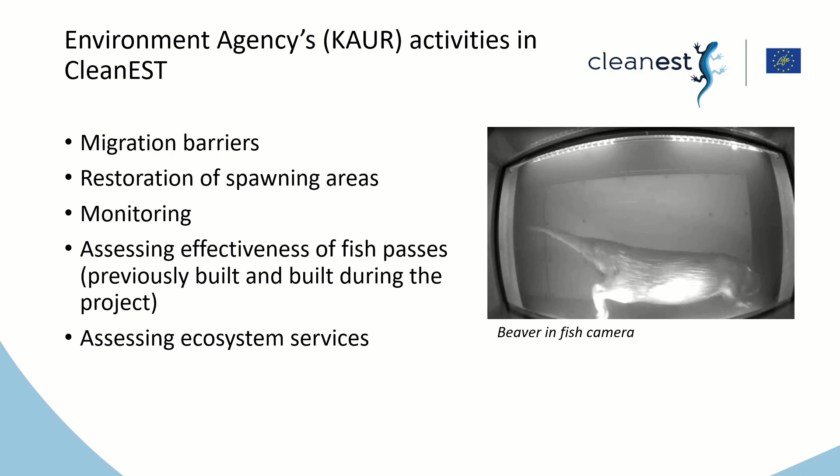Our activity C11 is addressing the migration barriers. In our project application, it is written that we have to find solutions for at least 6 migration barriers by the end of 2025. At the first stage of our project, we made an inspection of the Viru sub-basin migration barriers, and from them we selected our priority objects.

What are we dealing with? The selection was based on different factors, for example the fish population potential of the river, the technical feasibility of the projects, and the cost. The biggest object is the Püssi dam, and I will talk about it in the next slide.

For now, we have already demolished 4 dams from our priority list. The works have been done without detailed work projects, only with the technical assessment of a hydrotechnical engineer, and 3 more plus the Püssi dam are ongoing. These are the dams that we inventoried.

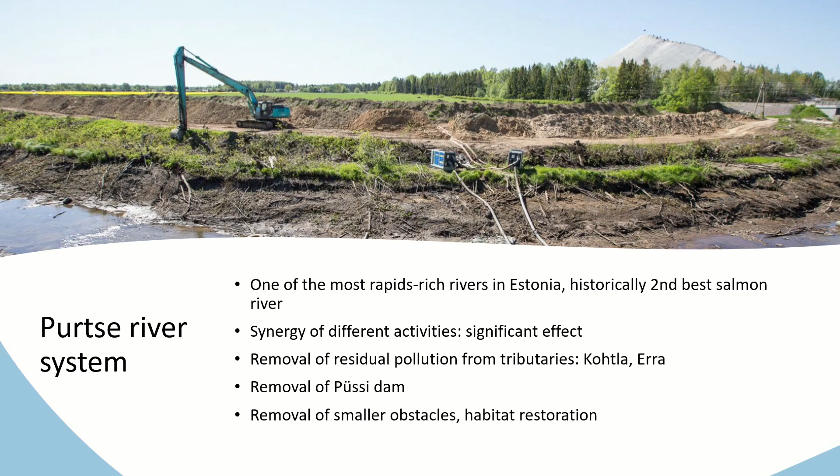Now I will focus on the Purtse river system. It is an important river in the context of our whole project. We are removing the residual pollution from there and its tributaries. The Püssi dam is also located there, and we are removing smaller obstacles, as well as restoring habitats and creating spawning areas. We are hoping that the synergy of these different activities gives a significant effect and improves the ecological condition of the river.

About the Püssi dam: it is the first obstacle from the river mouth that is completely blocking the migration of fish, so it is necessary to address it. The dam itself provides cooling water and firewater for the Repo company. At present, we have made a detailed work project, and we have also worked with the company Kobras on an environmental impact assessment of the project.

The owner is the Repo company, and actually they have been in bankruptcy for about a year now. But we are continuing with plans to demolish it and build a fish pass there, because there are possible interests for the Repo area, and possible new owners might want to use the water as well.

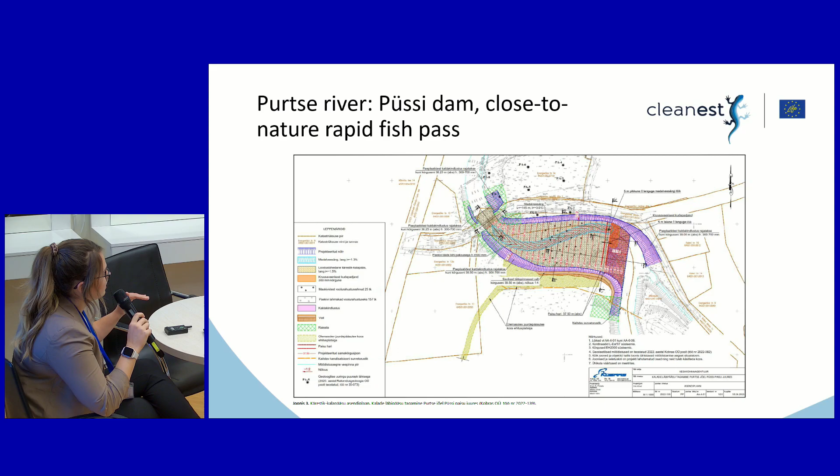So about the solution, we are building a close-to-nature rapid fish pass there. It's constructed wide enough so it maintains the water level that is there now with the dam. And we are also creating a spawning area at the upper part of the fish pass.

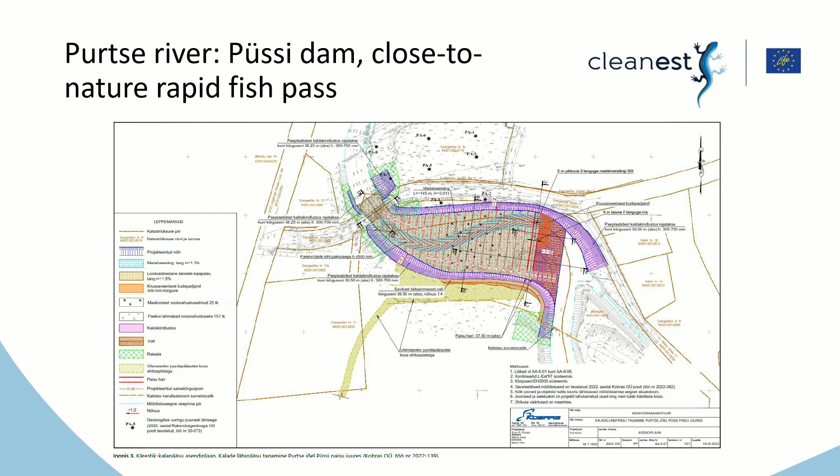Here is the location on the map. With the red is the Repo factory.

Another river we are addressing is Võsu River. This also has significant value as a spawning area for salmonids, and it's also in the list of regulation from the Minister of Environment, which protects spawning areas and water bodies of salmonids. And the dam owner operator must ensure fish passage both upstream and downstream in these rivers.

Mere and Metsa dams are the first ones from the river mouth, so their impact on the fish population is the biggest. And the dams serve no specific purpose today. The owners also have no water permit for damming.

There have been long negotiations with the dam owners. For Mere Dam, there was an issue from the Environmental Inspectorate for the owners to ensure fish passage. For both dam owners, it is important to maintain the current water level. Next to Metsa Dam, there is a motel, and they are using this little reservoir for swimming, for example.

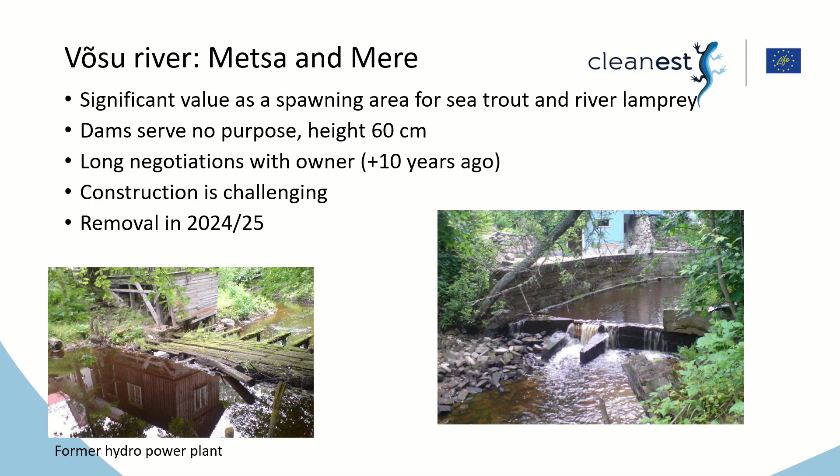So yeah, but the compromise at Metsa Dam is the owner has not given us consent to remove the object. We are making a close-to-nature rapid fish pass there, which maintains the water level.

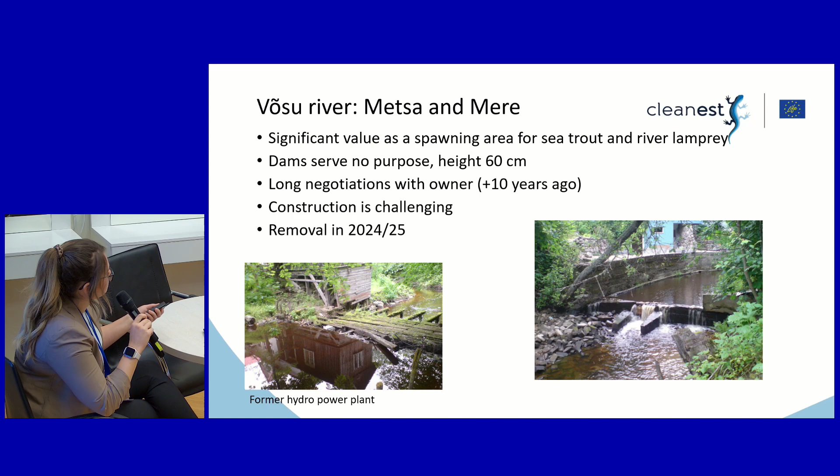One of our objects is Tamme Dam in Alajõgi River, which flows to Lake Peipus. The monitoring has shown that this barrier blocks upstream passage for fish coming from Lake Peipus.

There are also a large number of smaller dams or dam ruins located in our rivers, and we have removed some of these as well, some with the help of volunteers. I think it's also important work to deal with these.

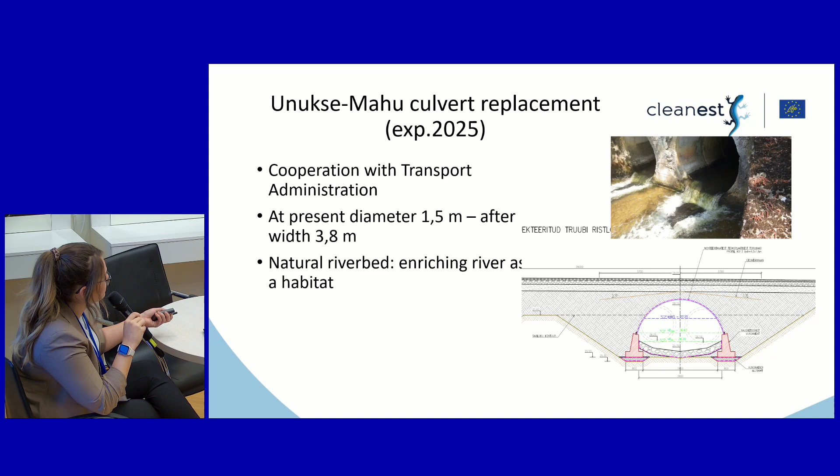One of our objects is a culvert replacement we are doing in cooperation with the Transport Administration. So thank you for listening, and I hope today's workshop will give us some solutions.

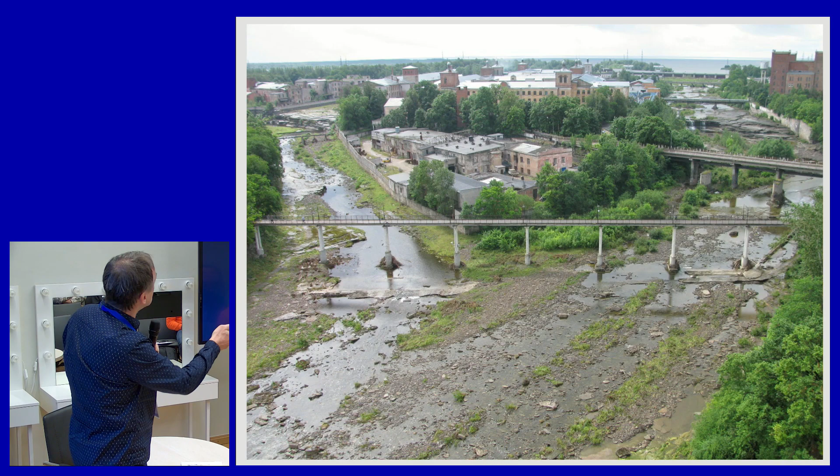In the right corner of the picture, there is a big dam, built almost 70 years ago. The whole Narva River was blocked with the dam, and a big reservoir, Narva Reservoir, was created as a result. You can see Narva town there on the map, and the big reservoir.

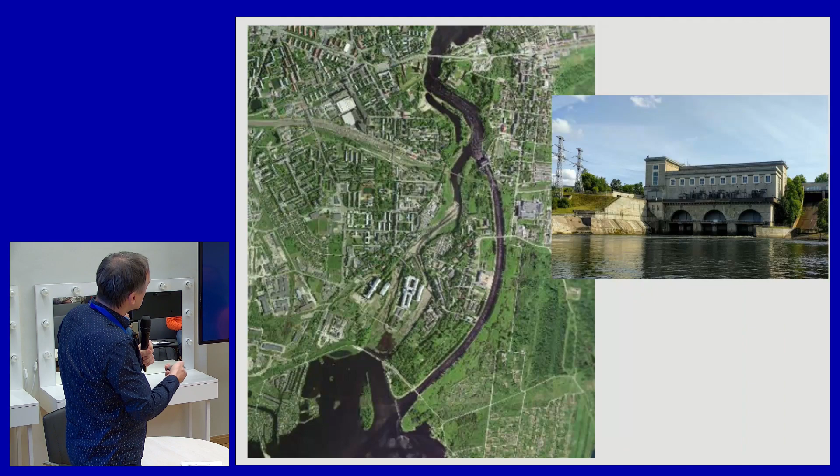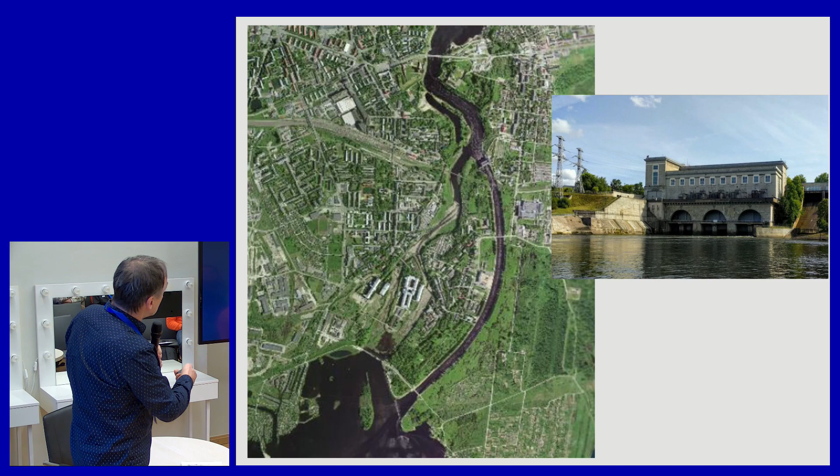What was it made for? It was made for hydro energy production. Now you can see where we are - yesterday we were sitting here. The natural riverbed is here, you can hardly see it.

Because it's dry - all the water of the river, around 400 cubic meters per second on average, is taken to the hydropower plant. You can see a picture of the hydropower plant. What's special is that as Narva River is a border river between Estonia and Russia, the hydropower plant is on the Russian side, so it belongs to Russia.

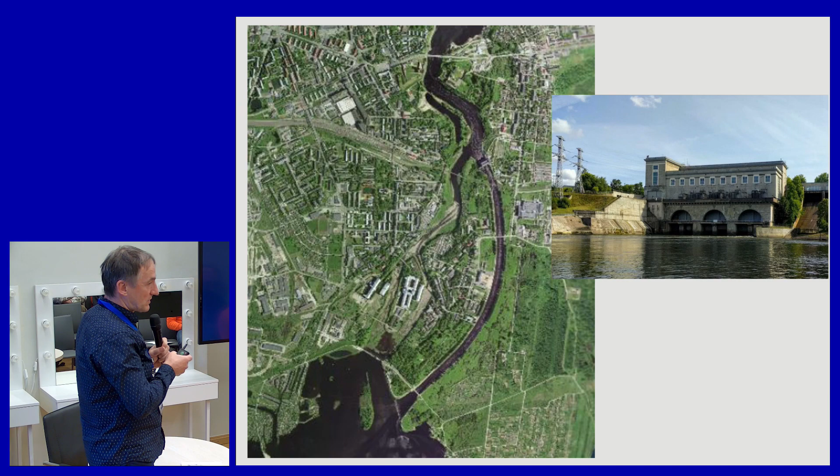It is producing money for the Russian company, and what does Estonia get? Nothing - just the dry river section. That section is not just one random part of the river, around 1 kilometer long, but it is the only section of Narva River where some fish species, salmon for instance, can spawn. So due to that dam, we lost the natural salmon population in Narva River, and a lot of other fish species suffer too.

Today we have a fairly abundant population of river lamprey still in the river. It could be much bigger, but we still have it - it's a very beautiful fish, but also a valuable one. The catches are some years 50 tons of river lamprey in Narva River. So that was, for a start, the closest dam, but the biggest dam.

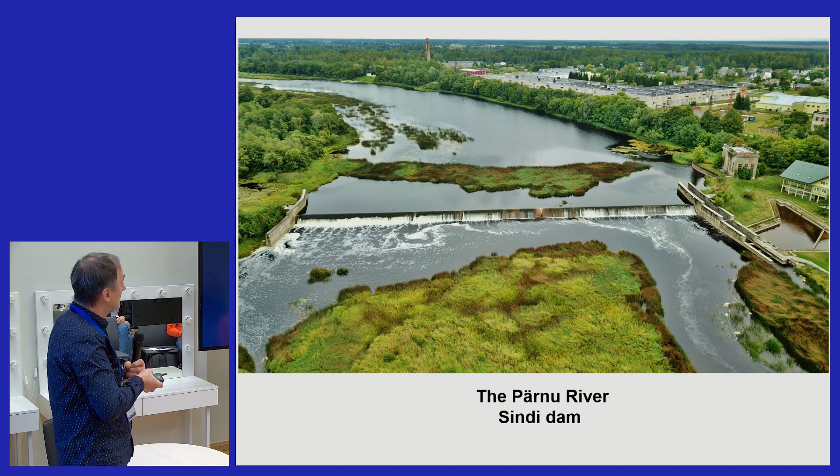When it comes to the Narva dam, we're not able to do much because it's under control of our neighbor - sometimes good, sometimes bad - which is now at war against Ukraine and killing people there. So we cannot discuss much about the Narva dam with Russia now. After they lose the war, we can come back to that issue.

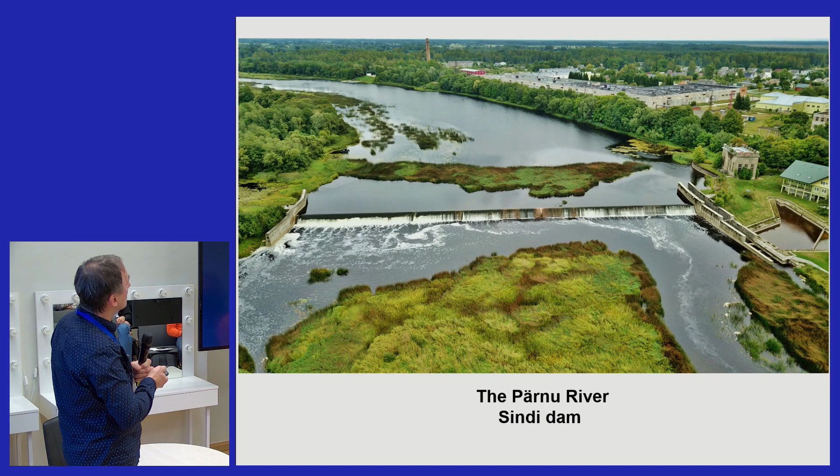That was not the only migration obstacle on Pärnu River - the Sindi Dam. There were more, but almost all of them are now opened, and the fish can go, and really are going, upstream everywhere. It's around 3,000 kilometers of running waters, smaller and bigger ones, and by now fish are already, we can say, everywhere.

But more general picture about Estonian dams after these two examples. For international audience, Estonia is quite small. I think it is 10 times less than Sweden, for instance.

And we have still quite many kilometers of running waters. It is calculated around 90,000 kilometers of running waters, and 1/3 of them are natural. Others are ditches and man-made ones.

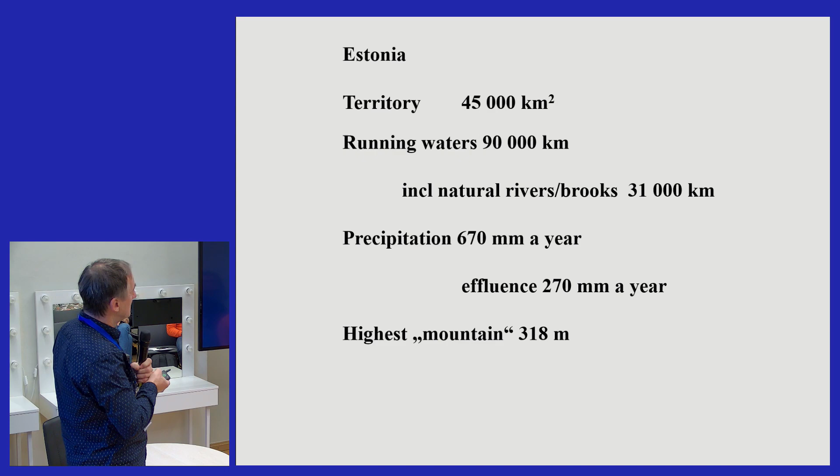One important thing to keep in mind is that we have rains, not very much, let's say medium amounts of rain every year, but the effluence, or the amount of water carried away with rivers, is around 30 centimeters. So we have some water in our rivers, but not much.

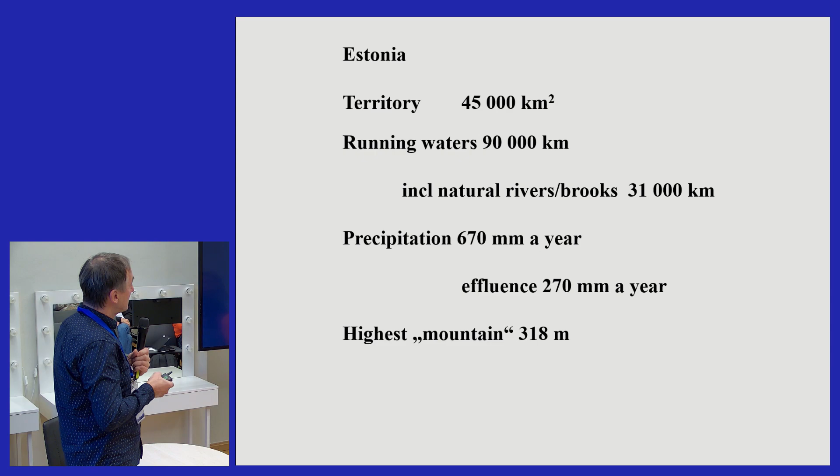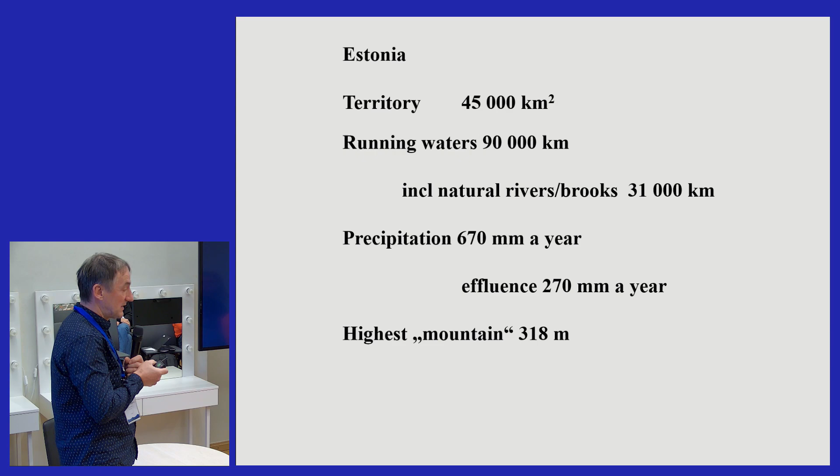And one thing more to consider is that Estonia is quite a flat country. Our highest mountain is a little more than 300 meters high. Ridiculous, some people would say.

And thinking about Estonian dams, very often when people think and talk about dams, the first idea is that dams are very important for energy programs of countries, and sometimes it is true, and sometimes it is not that direct. I'll just show you the figure I found about hydropower potential of different countries.

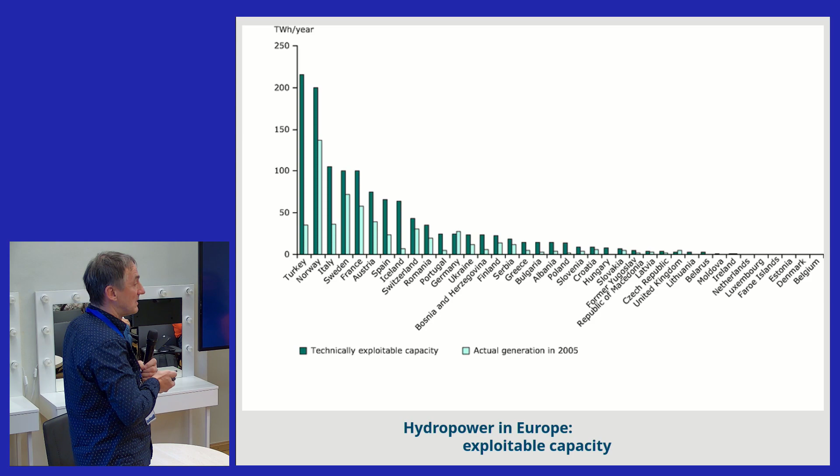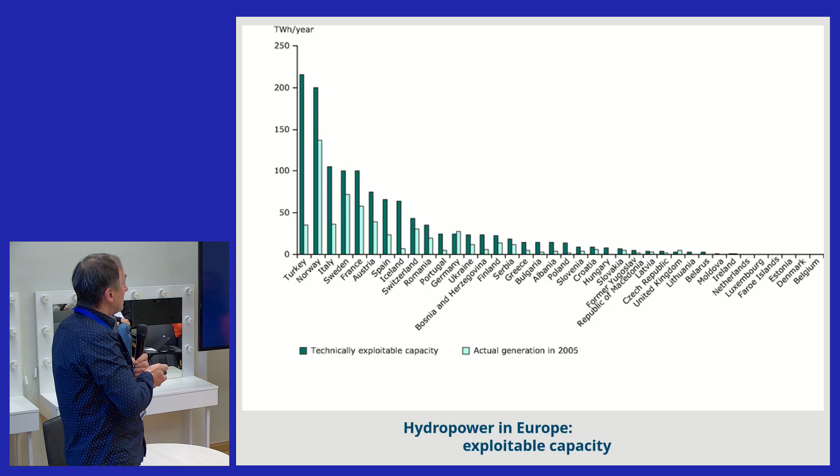When we go and talk to people from Norway, for instance, or even from Sweden, where there are mountains and big enough rains, for them in these countries hydropower really is something, and it is a key solution for energy programs.

But in Estonia, you can see in the end of that list, together with Denmark, we can exploit all our rivers and still get nearly nothing for our overall energy consumption. That is a very important thing to keep in mind: when we are talking about dams, it is not any solution for our energy programs, for our energy security. It is a little thing.

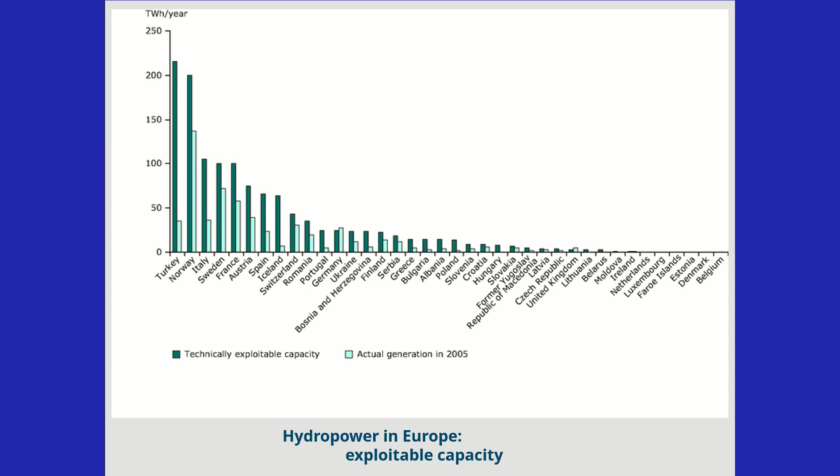In Estonia we had some inventory of dams, and the result was that nobody probably checked every single dam, but we can say that we have had in Estonia around 1,300 man-made dams. Plus, and it is important, we have a lot of beaver dams, but man-made dams and beaver dams are totally different things and different stories.

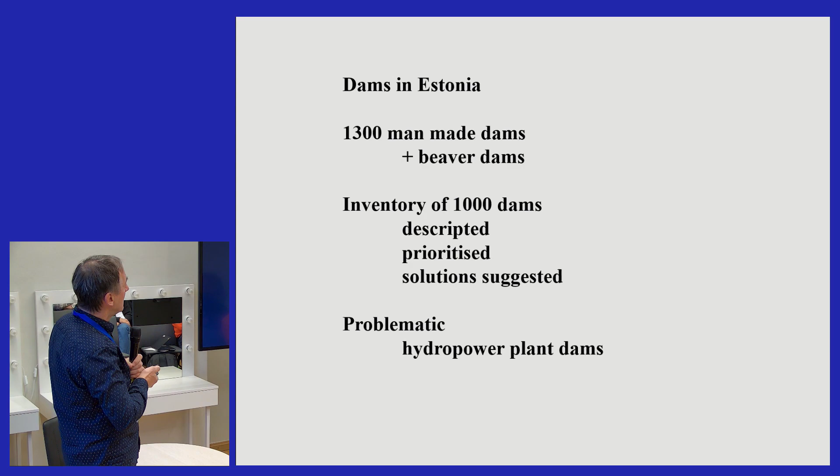So we got a good overview of our dams. Around 1,000 dams were really checked, described, and then prioritized in the sense of what should be paid attention to and what dams needed actions. For every dam there were solutions suggested: what to do, how to do it, what is the priority class of the dam, and so on.

And what became clear, and it was not a big surprise, is that in that long list of dams, the trickiest to deal with were hydropower plant dams, and it is very logical.

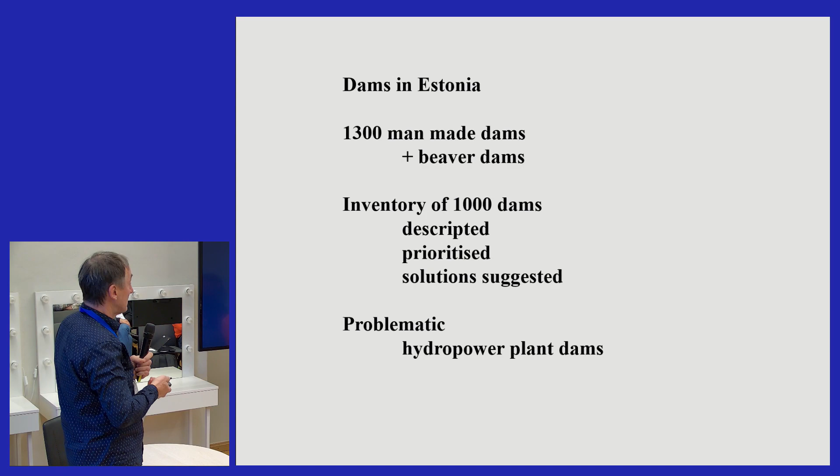And yeah, we have over 1,000 dams. They can be different. They can be partial obstacles, they can be total obstacles, and some of them can be passed by fish in good conditions, but in cases like this, there is no way to go up.

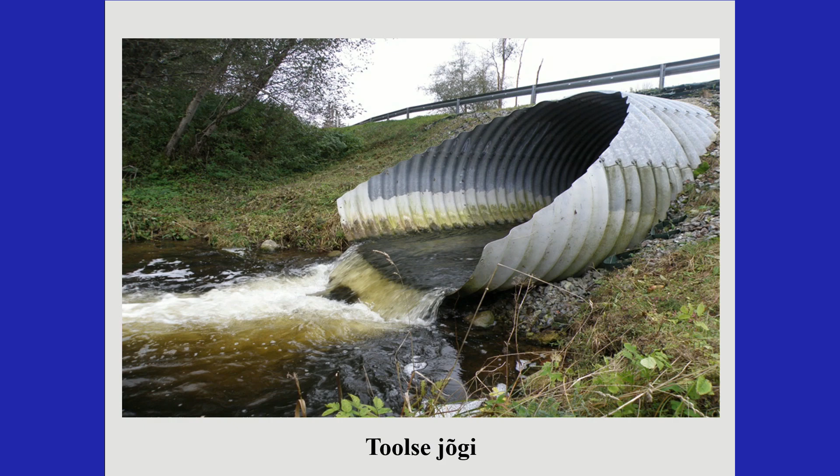And sometimes you can find migratory obstacles even in places where you cannot expect, because this is also a little dam, you can call it, because it is damming the water level behind it, and this is a problem for fish migrations, for fish species which cannot jump. For river lamprey, for instance, it is 100% effective — no lamprey can migrate through that obstacle. Looks like a small one, but it's actually a big one.

And then we have a lot of beaver dams. Beavers went extinct 100 years ago, were away for a long time, and then came back. Everybody was really happy, and now we have more than 20,000 beavers in Estonia. They are part of nature, so it is not man-made, and we cannot go and tell beavers what to do. There is a problem that people construct dams on bigger rivers, and beavers go to small rivers.

So from a fish point of view, we have a lot of migratory obstacles in our water bodies. And we have around 40 species, and part of them are so-called migratory fish species. It is easy to understand.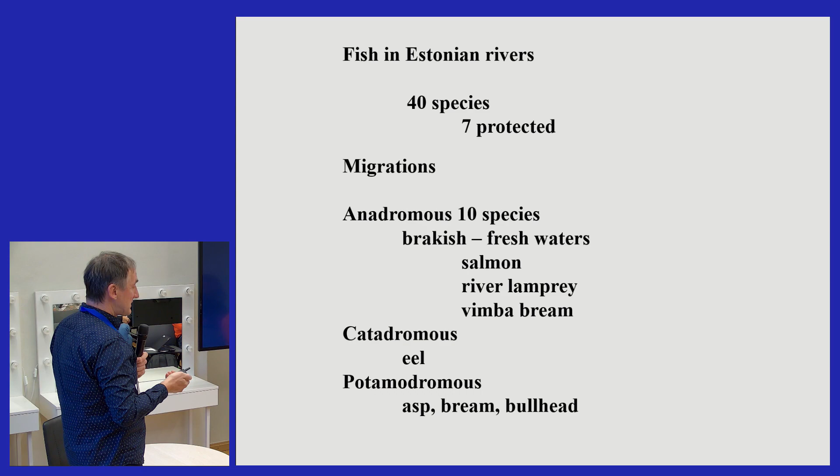They come from the sea and go to the river for spawning, or go to the sea for spawning, like some species. It is easy to understand that if we block the river, Pärnu River for instance, migratory fish cannot go to spawning grounds. But the problem is even bigger, because many riverine and freshwater species also need to migrate, to spawning grounds, then feeding areas, and then wintering areas. It is really important in inland rivers to think about that.

These migrations in freshwaters are called potamodromous.

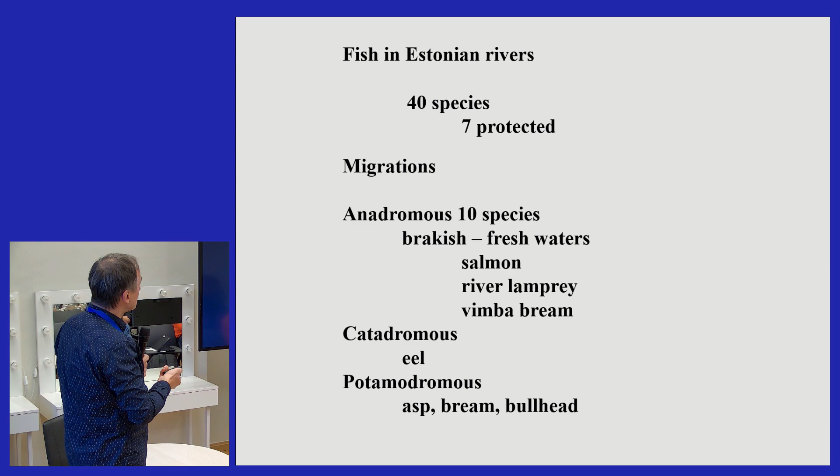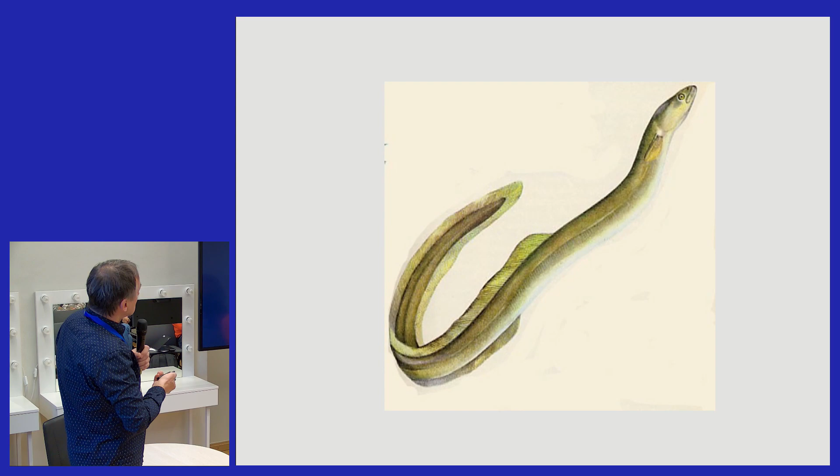It's in freshwater systems here, but still needs to do quite long migrations, because they need to go to the rapids. Estonia is a flat country with a limited number of rapids, so they need to make long migrations. But the good news is that we are dealing with our dams.

Estonia is doing well. You remember yesterday Thomas told us that in Lithuania there were, I think, nine actions taken. And I recently read some news from Latvia that they did their first dam removal. But Estonia has been really good.

When I got the invitation to come and talk, I always need to talk to people who know the situation better. So I called Tanel, he knows. Then Elina is someone you must always call, and then Sander Sandberg from the State Forestry Board, or agency. They know the current situation best.

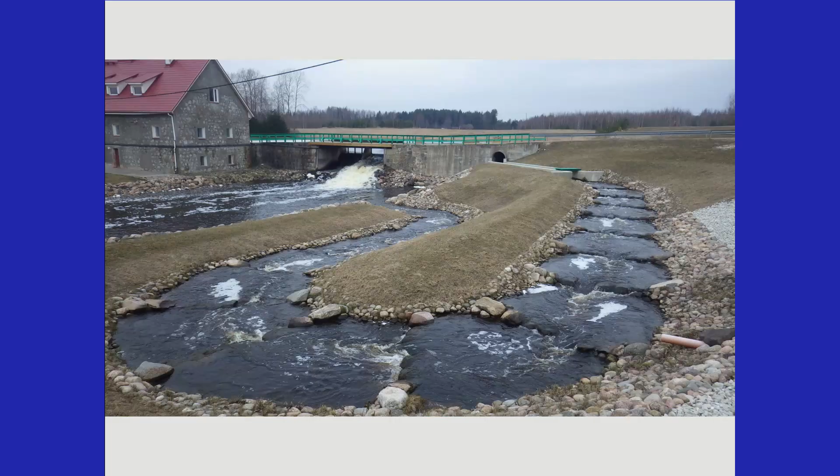I'll show you some pictures of different fishways. You can see the first ones were quite effective. This one and this one are not so functional.

We are doing removal and fishway constructions, and this is a big thing, so we need to see what the effect of our actions is. It's followed with monitoring, quite nice, good scientific level monitoring, and the effectiveness of these actions is checked carefully. We can say that in almost every case the actions have helped a lot.

There were some things - when you start something new, you need to learn, and that was the case in Estonia too, we started with little knowledge. Now we are doing much better, and what we saw was that it's getting better after every action.

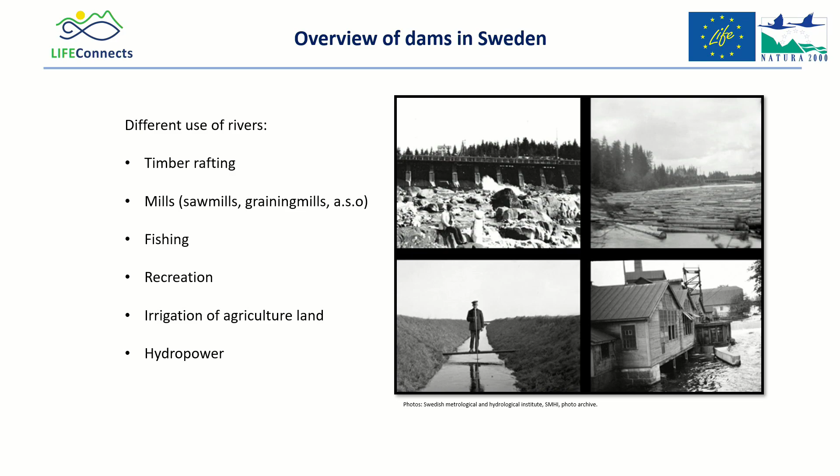Of course, there have been a lot of mills - sawmills, graining mills and so on. Fishing has been a big part in Sweden as well, not only in Estonia, and recreation. But later they became important for irrigation of agricultural land and hydropower. So many of these small mills that used to be sawmills and graining mills today are small hydropower plants. So we have a lot of dams having different purposes.

And if you look on the map, you can see the dams in Sweden. Sweden is, as we heard, 10 times bigger than Estonia, and we have a lot of dams. We have over 2,000 hydropower dams, and then we have a lot of regulatory dams connected to the hydropower plants, and also at least 5,000 other dams with other purposes, like water to industry and so on. But we also have barriers that don't necessarily give a damming area, but are still a barrier for fish migration and transport of sediments and so on. We have a lot of those as well. So we have a lot of work to do.

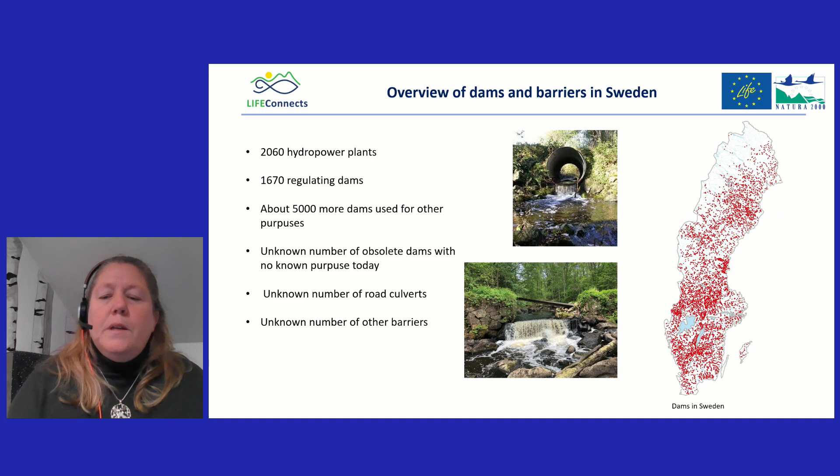For the hydropower plants, in Sweden we have a national plan. All hydropower companies need to renew their permits, so they get the modern permit. The new permit will say that they have to have fish migration pathways both upstream and downstream. But we have a lot of dams that are not part of this national plan, so we work mostly in our projects with these dams that are not hydropower.

But why do we work with it? Not only for nature, but even if that should be the most important one - we have the Water Framework Directive, we have the Habitats Directive, the EU Biodiversity Strategy. We have a lot of national goals, and I assume you have the same in Estonia, that we want to achieve.

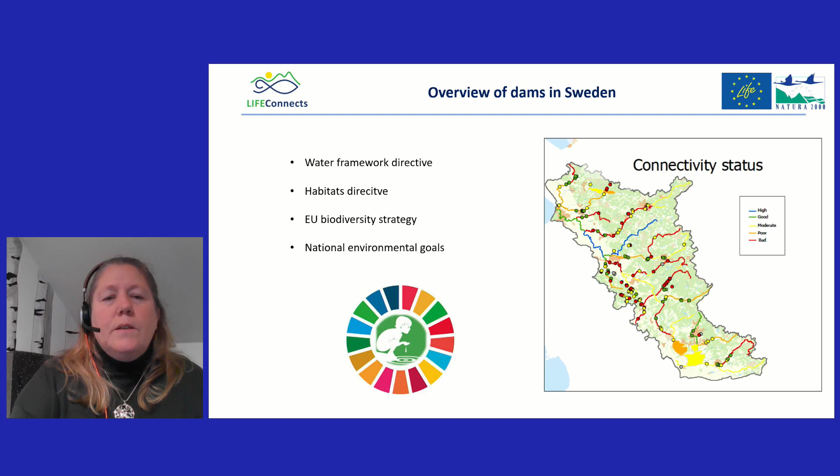So I think we work with this because of a lot of different directives and strategies and goals that we have, both international and national.

The Life Connects project works in the southern parts of Sweden in 7 rivers, and the one with the connectivity shown is number 1, in my county. We are 7 partners: 1 national authority, 2 county boards, 1 municipality, 1 university, 1 NGO - the Swedish Angler Association - and also 1 hydropower company. It's quite unusual to have a hydropower company working together in a project with an NGO like the sports fishing organizations, but I'd say that's really key to get good discussions and build understanding between different sectors and interests.

We started in 2019 and will go on until 2026. The budget is a little less than 10 million euros. The aim is to restore rivers to improve the conservation status for habitats and species, as well as the goals for the Water Framework Directive and Biodiversity Strategy.

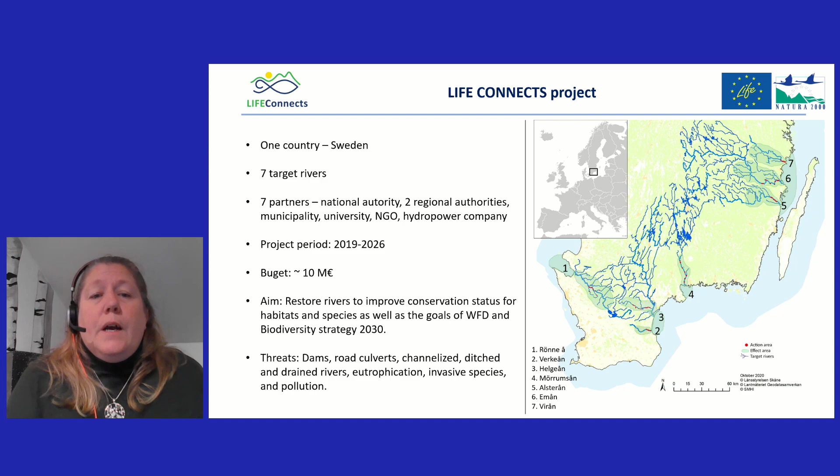We work mostly with dams and road culverts, and I will show you a little bit of that now.

In life projects, you usually have to focus on specific habitats or species. In this project, we have the target species of Atlantic salmon and the threatened mussel species, the freshwater pearl mussel and thick-shelled river mussel, because these two are among the most endangered mussel species in Sweden, and we now have them in just some of the rivers.

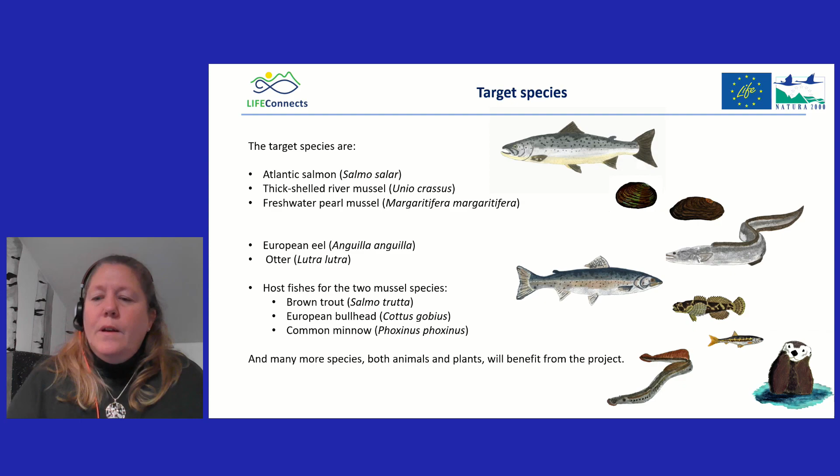When we do the measures, it will affect and improve the status of other species too, especially the European eel, the otter, but also the host fishes for the two mussel species, because when you work with mussels, you have to work with the host fish species as well. For freshwater pearl mussel, it's brown trout and Atlantic salmon. For the thick-shelled river mussel, it can be many different species, but most common is the European bullhead and the common minnow. Of course, both animals and plants and the total biodiversity will benefit from the project.

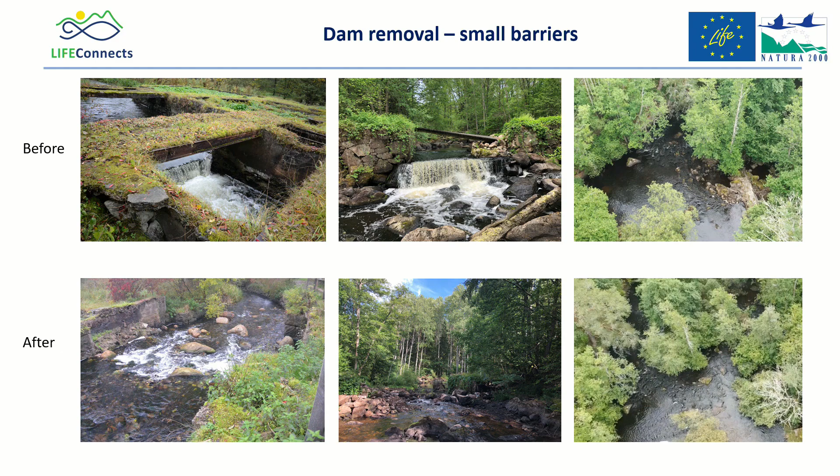But we also remove smaller barriers that are not in use anymore. You can see some examples here in the upper pictures, before, and the lower pictures after we have removed them. But often we also have to do more than just remove the obstacle, because most often the river is affected in many ways, not only with barriers. They have been cleared of larger boulders and stones, or ditched in some ways. I will come back to that.

But sometimes you can't remove a barrier, for example when you have a hydropower plant that generates a lot of energy. In Sweden, hydropower is really an issue - around 50% of all the electricity we use comes from hydropower plants, so they are really important. Sometimes you can't remove them, and you can't build a natural bypass because there are buildings around, it's very narrow - you don't have the place for doing a bypass.

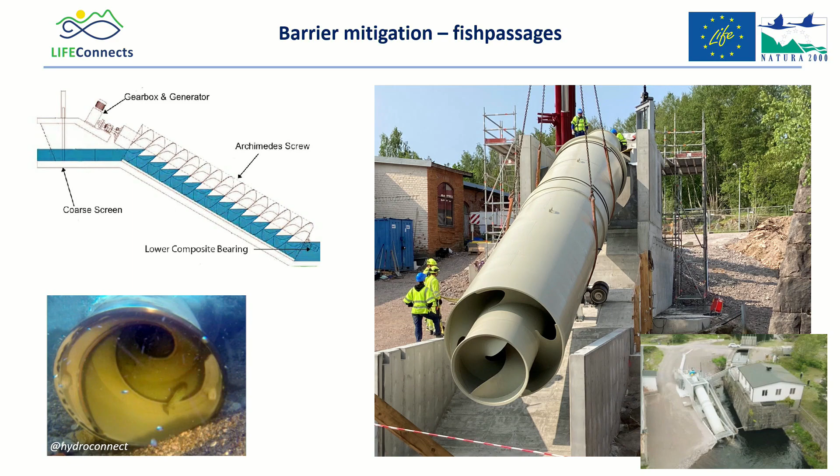So we have actually tried a new method: this is a double Archimedes screw that was installed in one of Uniper's hydropower plants this summer. It's just been installed, and the interesting part was that the day after the installation, one brown trout was detected going downstream. So it seems to work.

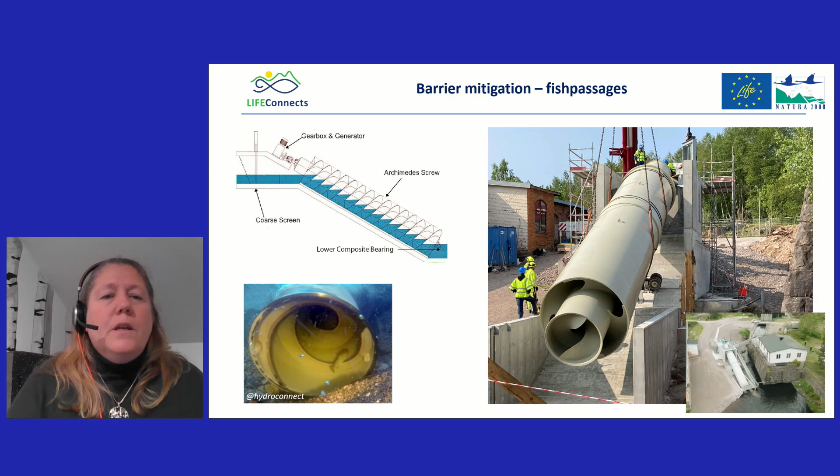But to really know if this will work, we are monitoring it a lot. We have 3 fish counters installed upstream and downstream from the screw, and we also have a lot of telemetry studies being done, electrofishing upstream and downstream, and so on. This is the first one installed in Sweden, so it will be monitored a lot to see if it works well, because then this could be an alternative when you have problems building natural fish passages.

So it doesn't help if we just remove the dam, because then the host fish go up, but they don't have any spawning or nursery areas, so they just pass by the remnants of the mussel populations. So you need to do both the removal of the barrier and the restoration of the habitats. Otherwise, I think we will lose a lot of effects of the removal of barriers.

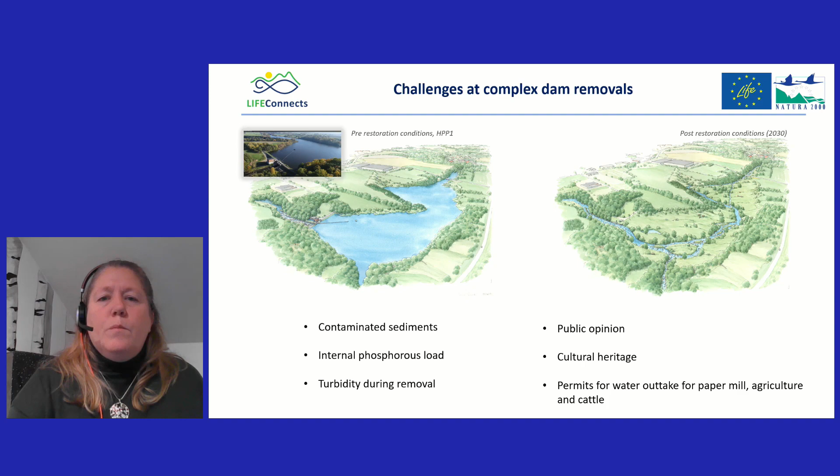So at least I want to talk about some experience from the project and some questions we can discuss in the workshop - when you are doing larger dam removals, they can be very time consuming. I would say in Sweden we have this national plan for the hydropower plants, and they have calculated it will take 20 years.

All of you can see that, well, 20 years, then we will not achieve the goals for the Water Framework Directive until 2027, or the biodiversity strategy to 2030. We will not achieve the goals by that time because all these processes are very time consuming, and since we have almost 10,000 dams to tackle, we will not be able to achieve the goals. But what would we try to reach? Because I think it's not good to just say, well, we didn't reach the goal. So what would we aim for instead?

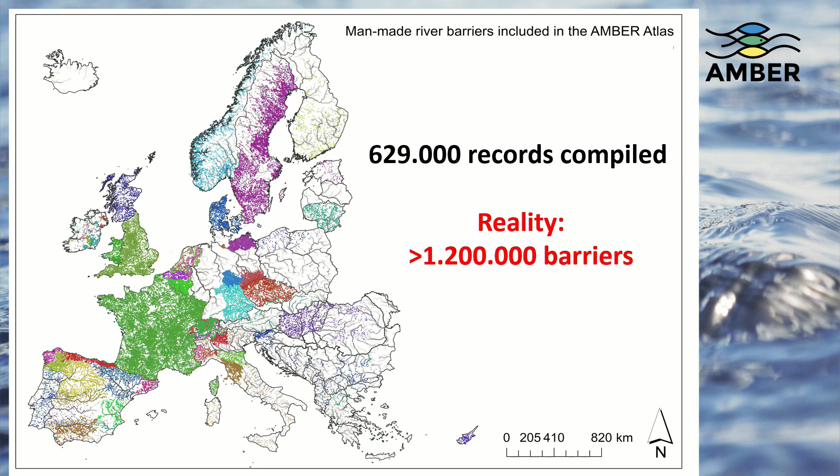At the same time starting this project, we started Dam Removal Europe, which is a movement of people already working on removing barriers in Europe. What we try to do is support them, facilitate information, highlight their work, and show that this is positive, because until now, and especially a few years ago, it was like a taboo talking about dam removal.

It was something negative, more in some countries than others, but basically in all Europe except Finland, which is a very special case. So we discovered in 2016, when we started, that at least we had removed over 4,000 barriers. In some countries they had started almost 30 years ago removing barriers, like France, Denmark, or Spain.

And why? What are the main reasons these countries, these governments, are removing these barriers? Well, first of all, in some countries it is national legislation. For example, in Spain or Austria. In Spain we have a very clear legislation where it says that any infrastructure in public domain, and rivers are public...

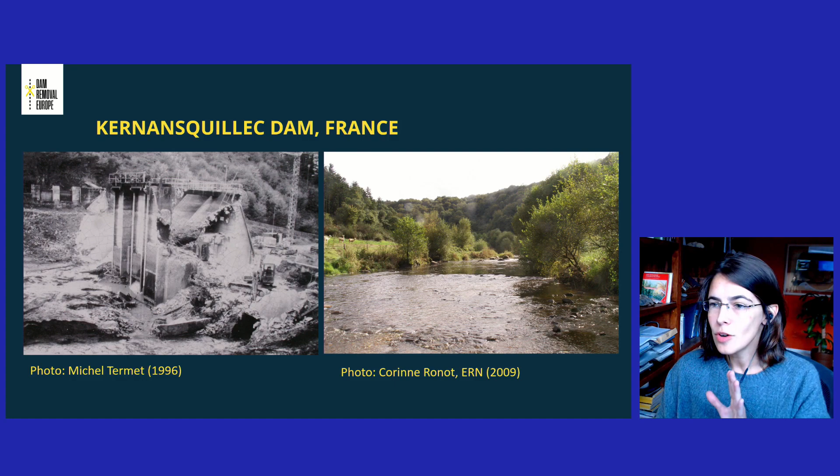They knew this. So some countries, like France, who is the leading country on dam removal, started in the 90s to remove dams. Thanks to the Water Framework Directive, they started to really speed up and scale up and used this tool. It was the perfect tool to really enable them to remove more dams.

And the main reasons in France, for example, is water quality. In these examples, improving water quality is one of the main reasons they remove dams. Also safety, and also fish passage and increasing biodiversity.

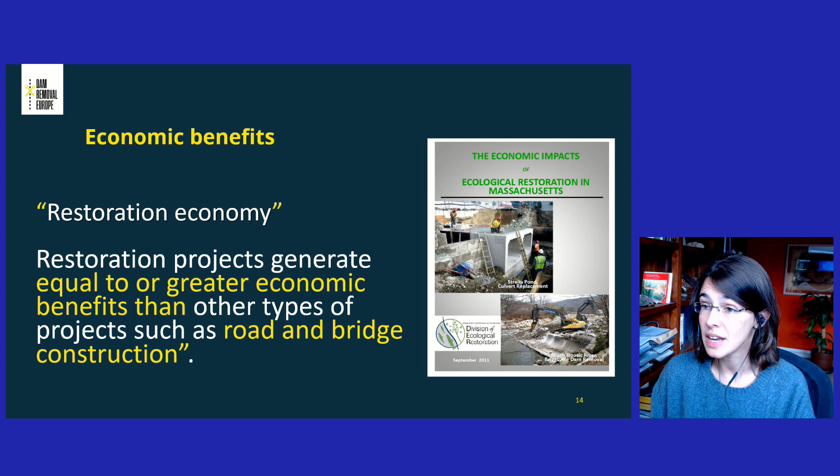But also, if you try to find more information about economic benefits, you can find that in Massachusetts, for example, the government did a 3-year annual analysis on the economic benefits of river restoration and dam removal in this state. And the conclusion of each annual analysis was that restoration projects generate equal to or greater economic benefits than any other type of project, like road and bridge construction. So I think it's very important that we break society's mental barriers, because it's not wasting money removing dams at all - they also generate economic benefits.

But it's not the only reason why dams and weirs are being removed - especially the obsolete ones - it's also about trying to recover our river productivity. Europeans have forgotten, especially in the Mediterranean countries, I have to say, how productive our rivers were. For example, in Spain, the most consumed fish among locals, except people living on the coastlines, was eel and lamprey, and that's completely gone. I mean, we have absolutely wiped out inland fisheries.

In the past 50 years, 93% of the migratory fish population in Europe has declined. And we have completely destroyed jobs, because we used to have a lot of jobs with commercial fisheries in inland, fluvial river fisheries - completely free, self-sustainable. We didn't need to build any hatcheries or anything.

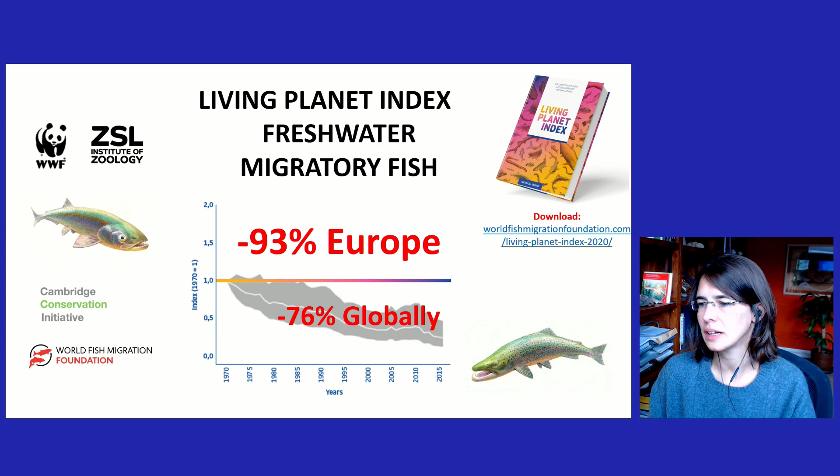This is actually another reason why some countries like Scotland are trying to recover, for example, their wild salmon stocks, because it's almost gone - wild salmon - and they want to recover these fisheries, not only as a food source, but also to activate the rural economy. Same with Denmark - Denmark started removing, it was one of the first countries to start removing small barriers and abandoned watermills, to recover their wild salmon and trout population.

This is a project on the Hiitolanjoki River - you must have heard about it in Finland - where they had 3 hydropower dams, very old. Their economic benefit was very little, they created very little energy, and they decided it was worth removing these dams because building fishways was too expensive compared with the benefits they got. And after removing these 3 active but old hydropower dams, the river is completely free now from barriers.